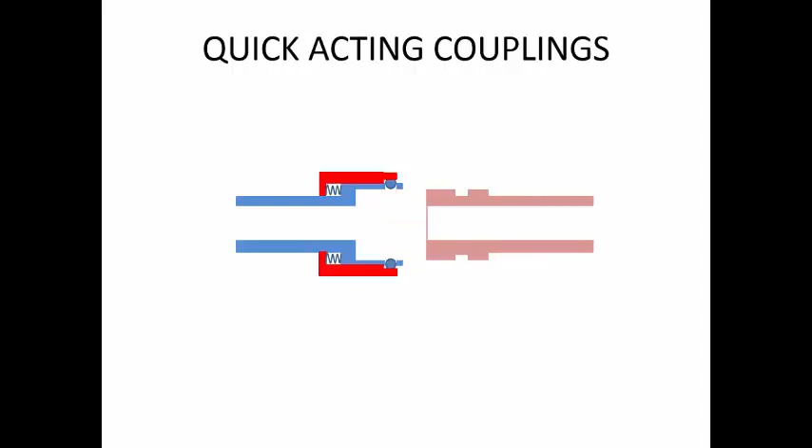So the element which is going to help us in making such a type of connection is called a quick acting coupling. The name coupling itself tells that it is going to help us in joining two elements of the hydraulic system. There are three basic types of it. The first one is straight through coupling. Second one is one-way shut-off coupling. The other one is two-way shut-off coupling, also called self-sealing couplings. Now we will see how each one of them functions.

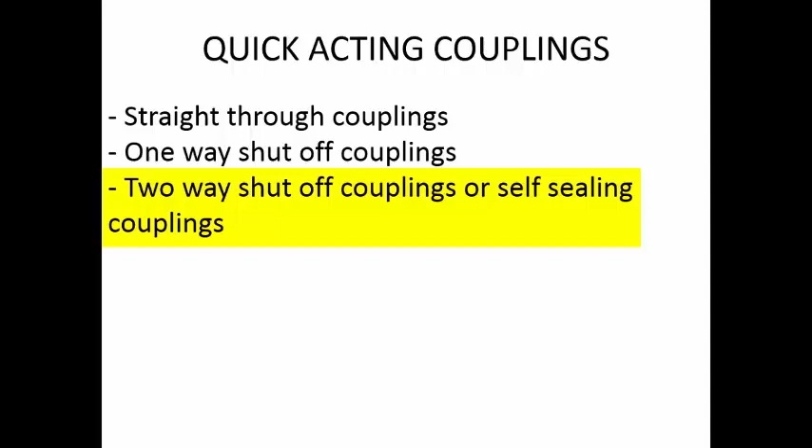So the first one is a straight through coupling. In a straight through coupling, you are having two elements. This is one end, this is another end. We want the hydraulic fluid to flow through the pipe, so we should make a leak-proof joint. These are the two piping elements. Then you are having a sleeve. Then you will be having a spring which will hold the sleeve in position. Then you are having a ball. So this is the important thing.

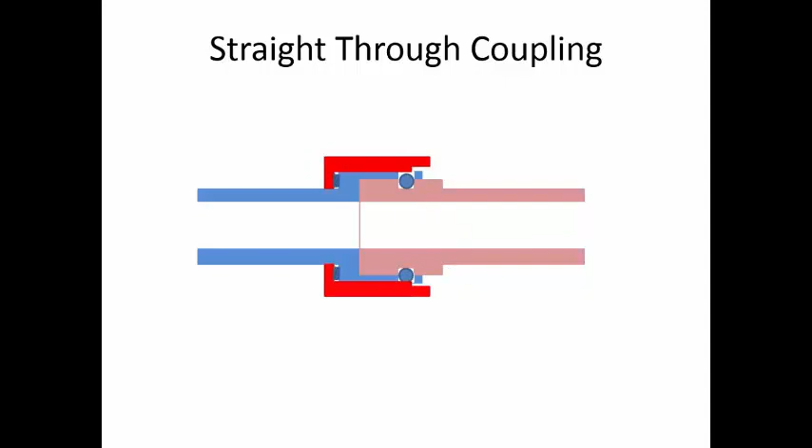Now first, if you want to make the coupling, you have to pull the sleeve backwards. Then you insert the pipe into the coupling. When you are inserting the pipe, the ball will be lifted upwards because there is sufficient space for it. You continue to insert the pipe, and when the two pipes are connecting face to face without any gap, the two grooves in the second pipe and the first one will be along the same line, and if you release the sleeve, the ball will be pressed down. You cannot separate the two piping elements because the ball present here is stopping the movement.

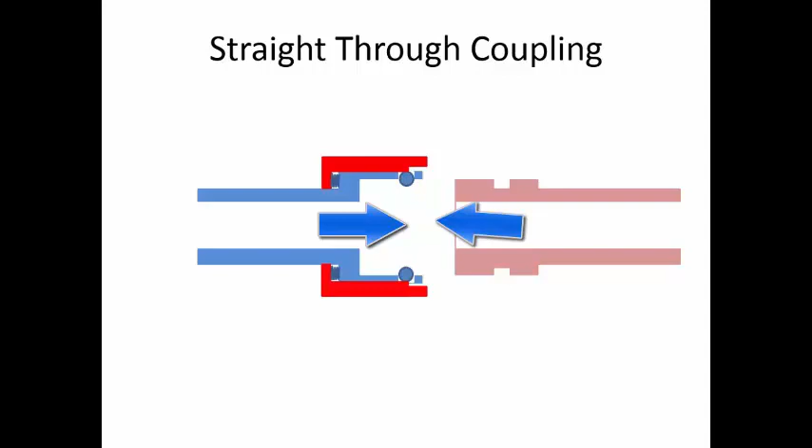Now, if you switch on the pump, the flow can happen without any leakage. If you want to separate it, all you have to do is pull the sleeve backwards and separate the two piping elements. So you can make this connection any number of times without any damage to any of the members. It is called straight through coupling because you are not stopping the flow at any point of time. So if there is some oil present in the pipe, it will simply flow out and the oil will be wasted. That is one issue associated with straight through coupling.

The next type of quick acting coupling is one-way shut-off coupling. In this case, you are having two elements which you want to connect. In one of them, you are having something called the poppet valve. So this is a poppet valve. Now, what is a poppet valve? A poppet valve is the valve in which the flow passage is closed by something called a poppet, which is held in position using a spring.

So if you are applying some force here, this will move backwards and the flow path will be open. And if you remove the force, the spring will ensure that this element is resting against this surface and the flow path is closed. Which means the flow cannot happen in this direction, but if you open the valve, then the fluid can flow in this direction or in the other direction.

So this valve will be open only when you are keeping this particular poppet downwards and keeping the passage open. Now how does this operate? So again the operation is same. You are having a sleeve, you are having a ball which will hold the two piping elements together. This is the second pipe, and in the second pipe you will be having some element which will ensure that this particular poppet will be pushed backwards and the flow path will be kept open.

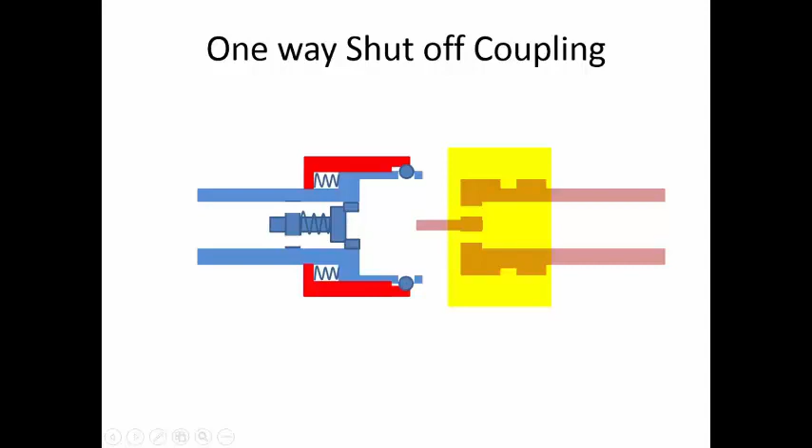So now we will see step by step. So first you have to pull the sleeve backwards. If you are not pulling the sleeve backwards, what will happen? This ball, whichever is present half inside, it will remain like that. So when the ball is half inside, this particular piping element cannot enter because this ball is going to obstruct. But when the sleeve is pulled backwards, there is sufficient space on top here. So when this element is coming inside, the ball can be pushed upwards. So we'll see. So the ball will be pushed upwards.

Now, this particular element is just touching the poppet. If you further move it, the poppet will be opened, the flow is going to come inside and it can flow here. So you are pushing it inside. So you have to completely push it inside so that it is touching at the end surfaces, and the two grooves here will come in the same line, and the ball can sit here and it can lock the two elements. Then you have to release the sleeve. So once you release the sleeve, then the ball will be held in position, the coupling is formed, the flow can happen.

Now why it is called one-way shut-off coupling? It is called one-way shut-off coupling because even though if you are separating the two elements, one of the elements is having a poppet valve which will make sure that the flow is not happening through it. So that is why it is called as one way. In the other element, it is open.

This kind of coupling is present in your gas cylinder where you are using the regulator. So you are fixing the regulator. Now how you will fix the regulator? There will be something like a black gasket. You just have to lift it upwards. The moment you lift it upwards, the same thing, the sleeve will be lifted upwards. Then you will be having some space for the element to have motion. You press it on top of the cylinder. Then once you release that particular sleeve, the two elements will be in a joint.

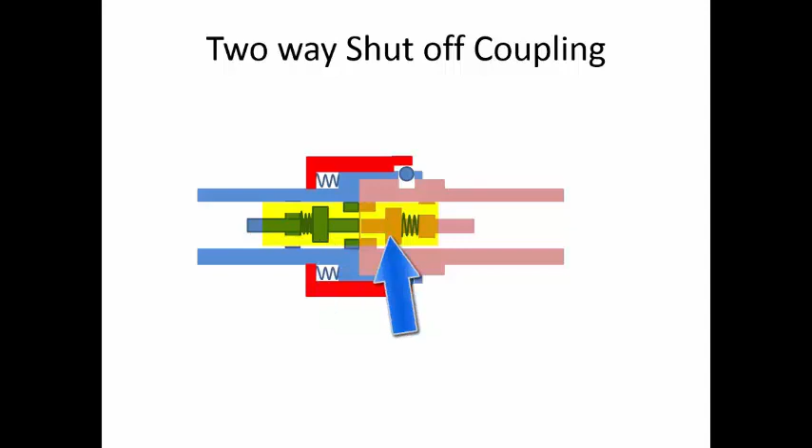If you push them further, you can see here, this one has gone back, so the flow path is open. This poppet also has gone back, the flow path is open. So the flow can take place in this direction or in the other direction without any issues.

Then once you release the sleeve, the balls will be pushed down into the groove and it will be held in position, because of which the two elements cannot separate and they will be in a locked position to ensure that a leak-proof joint is created. So it is very easy to make the connection and very easy to break the connection. That is why it is called a quick acting coupling.

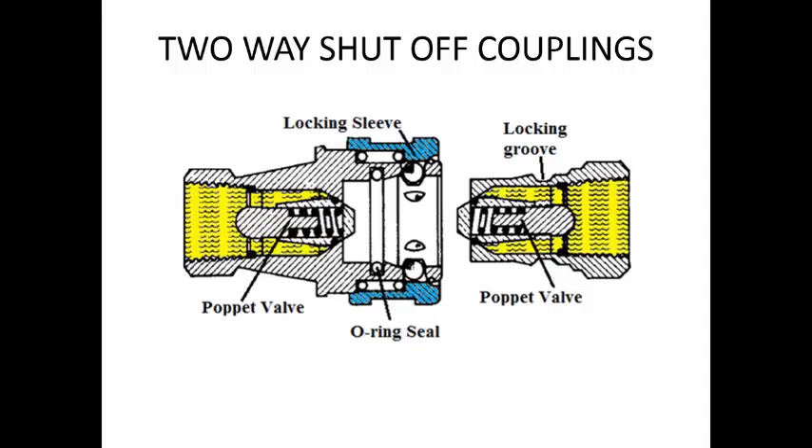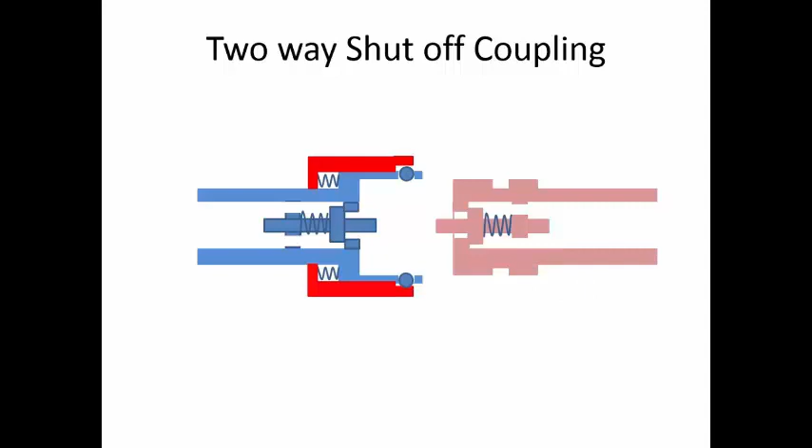So what is the problem associated with them? The problem associated with them is they are going to reduce the cross-sectional flow. Whatever the area available here and whatever the area available here is equal, but in between you are seeing a lot of reduction in the area. So there will be some amount of pressure losses because you are using shut-off couplings.

But if you want to reduce the pressure loss, then we have to increase the flow path here. If you are increasing the flow path, the size of this element is going to increase tremendously, which may not be very beneficial for easy handling. Its weight is also going to increase. So we are taking some amount of pressure losses because we want very quick assembly and very quick disassembly of the two connecting elements. So this is the two-way shut-off valve.

The two-way shut-off valve is very advantageous because the moment you disconnect the two elements, whatever fluid is there inside, it is not going to come out. So the fluid flow is shut off very quickly. So no amount of fluid is going to be wasted. But in case of straight through and one-way shut-off valves, whatever fluid is there in the pipe, it will immediately start to flow out.

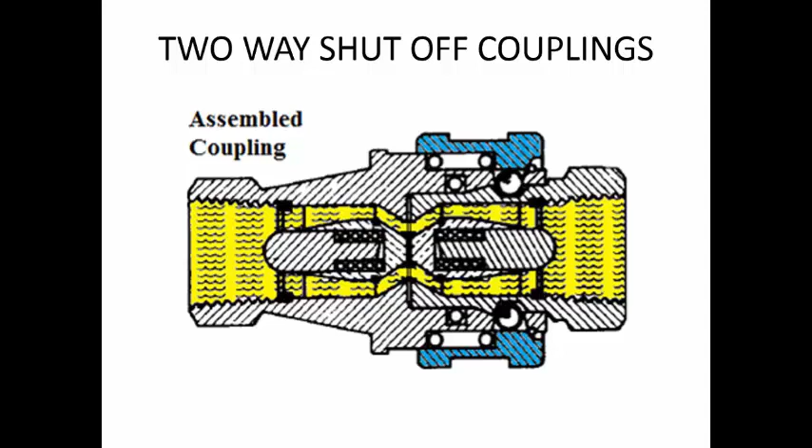So it will immediately start to flow out, or if some moisture or air is there, that can enter into the piping, which you have to remove carefully. Otherwise, that air will remain trapped inside and it will create its own problems. But all these things are eliminated in a two-way shut-off coupling. The cost also is going to increase: straight through is the lowest cost, whereas two-way shut-off coupling is of the highest cost. So this is about the quick acting couplings, their working, their advantages and disadvantages.